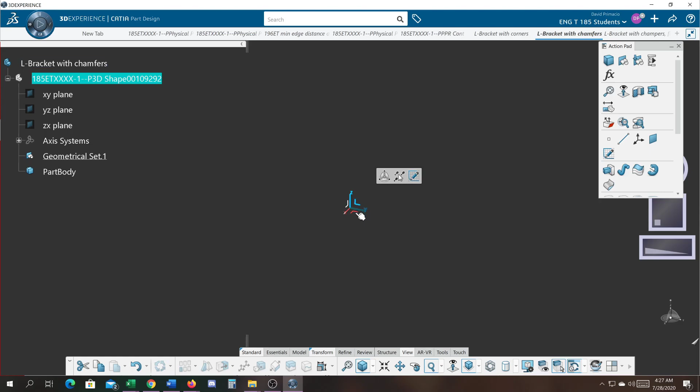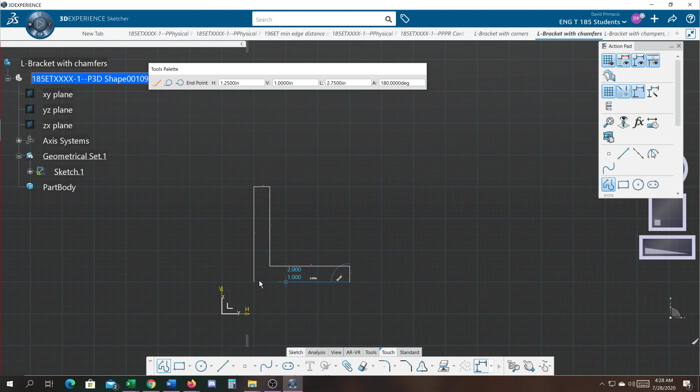We'll go ahead and select this profile and go into Sketch. I'm going to use Profile and sketch my shape, 3 inches and 3 inches, so both legs are 3 inches long.

Let's go ahead and constrain this. I'll use auto constrain, reference these two edges, stack dimension them, and select OK. Unlike the first demo, this is how you would really dimension this part.

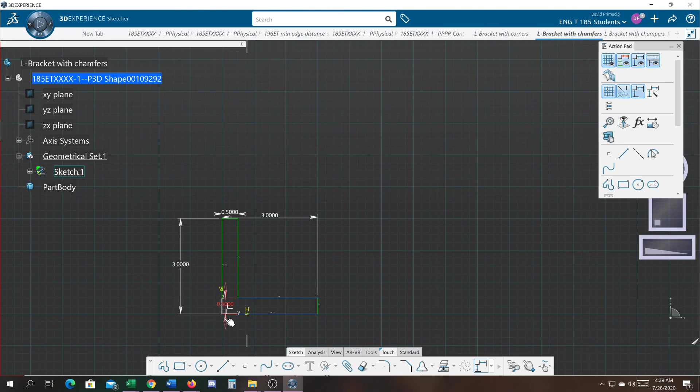One of the things I try not to do is move the constraints, because sometimes it starts adjusting them. So what I do is I get it green by contacting this to my axis. Now when I go to move this, it'll be easier to move, and it won't try to change anything on me.

I'm going to try and grab this and move it up, just because I have a hard time reading it and checking the visibility out on that. You want to dimension to features. These are features, and again, the 3 represents your leg lengths, both horizontal and vertical for this part.

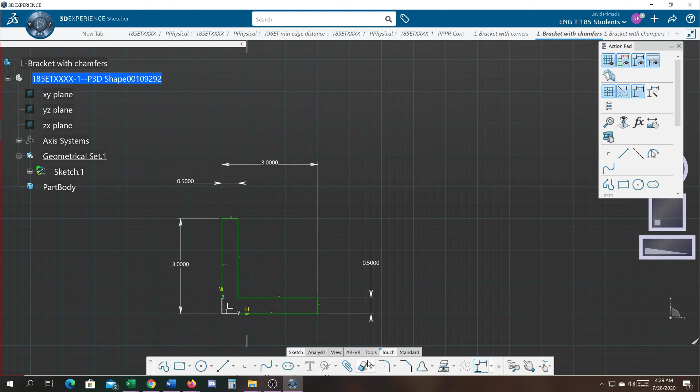We can exit the sketch. The pad is to be 3 inches long as well, so we'll pad this out. We'll go 3, reverse the direction, select OK.

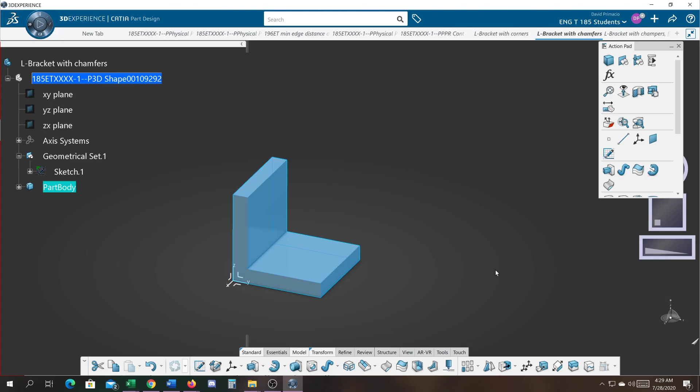We don't want the sketch to be in 2 places, so I'm going to drag and drop it into the part body. The next feature I'm going to teach you is chamfer mode. Chamfer just puts on a flat edge.

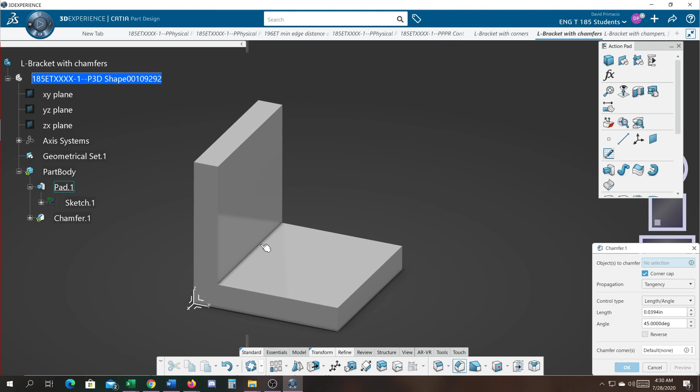So I'm going to do a chamfer, and like we did in the fillet exercise, I'm going to chamfer this line right here, and we'll do a 1/4 inch chamfer. I'll preview that and select OK.

This works the same way as fillets does, and you can see that I can change the angle at any time or the length. Or I can modify the existing chamfer by double clicking it and selecting the edges just like I did using fillets. You notice I got chamfers on the edges here.

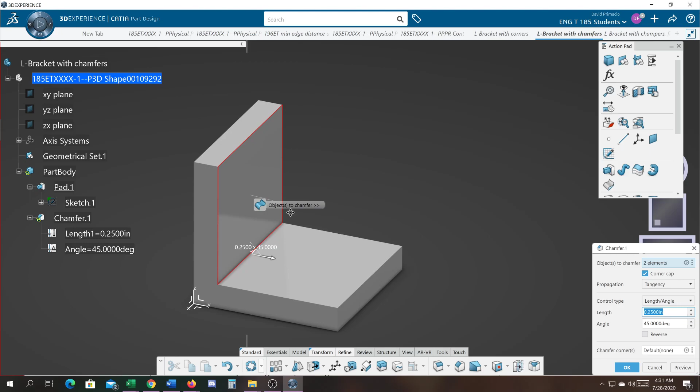So what I'm going to do here is remove those chamfers by double clicking them and grabbing the edges. By the way, I caught the face on accident. Just reactivate the face and it will turn the entire face off.

Another way you could do this is by grabbing the top faces and the bottom face over here, and when I select preview, it wants to do all the chamfers. The only thing is it's a 1/4 inch chamfer and the part is 1/2 inch, so it will run out of material.

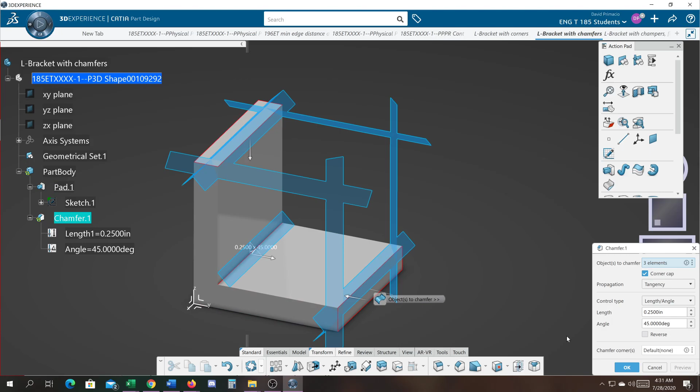I'll try and say OK, and it'll do it if that's what you wanted, the sharp edges on top there. I can change this length though to 1/8 of an inch, and now you've got this whole part all chamfered off.

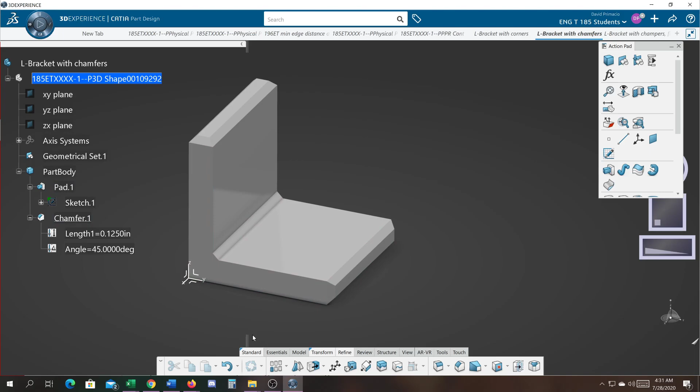It's hard to see the chamfer, so one of the things I can do is go to properties and change it to another color. I'll try salmon color. Now it's a little easier to distinguish the chamfers.

Let's say I want to turn this top off. I double click it, grab the top, and select OK. And you might ask yourself, why didn't it go away? Did anybody catch why it didn't go away?

I'll double click it, grab that top surface, and select OK. Now how did I get a chamfer here and the chamfers go away on the top?

Well, I wasn't being careful when I chose, so I double click this chamfer here. I tried to grab the surface to turn it off, but I missed the surface originally and grabbed the edge instead. So this edge is being chamfered, and then I pick on the face and now the edge and the face is being chamfered all the way around.

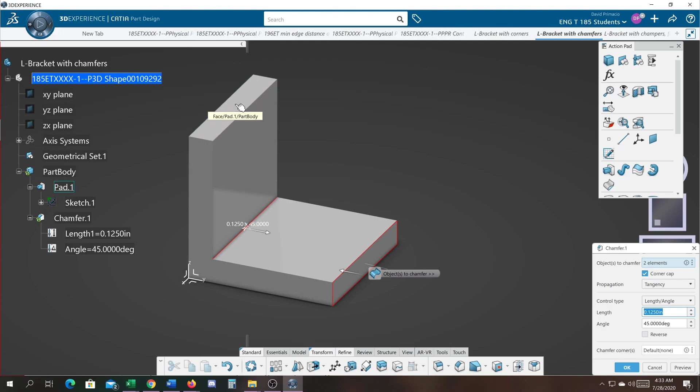So just be careful when selecting that you recognize what's on and off, what you're really grabbing. It might be best to wait and see if you can get the word 'edge' to show up so you can deactivate the edge, and wait for the word 'face' to show up if you want the face to be chamfered. I'll select OK, and we'll do one more chamfer.

I'll chamfer the bottom, which is going to be a bigger edge. I'm just going to make that a 1/2 inch. Okay, so now I've got a 1/2 inch chamfer, and if I go to view and hit my ISO view, I got the 1/8 inch chamfers all along the top and this front surface and right in here.

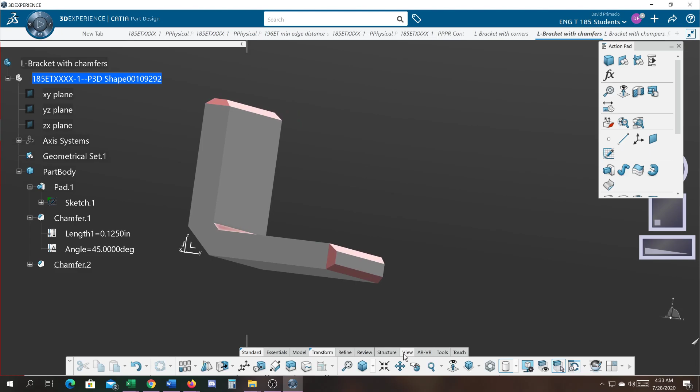Again, if I wanted this one to be bigger, you can't alter it directly. I could double click on it, turn that off, select OK, and then go to that edge and refine this chamfer on that edge.

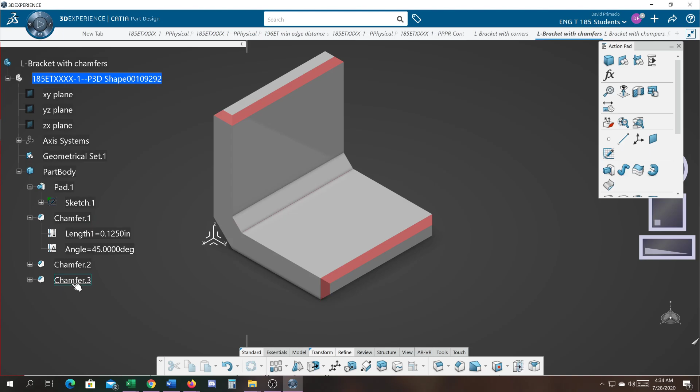To 1/4 inch. So I have different chamfers at different sizes: 1/8 inch, 1/2 inch, 1/4 inch.

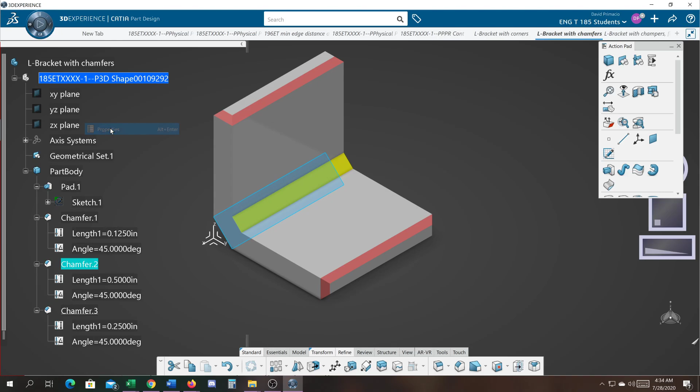I can change the colors. You can get crazy and come up with a bunch of different colors representing each different size. I probably wouldn't do any of this in production, but just for clarity of what's going on here for this particular demo.

You can now see the different chamfers here that were created on this particular part.

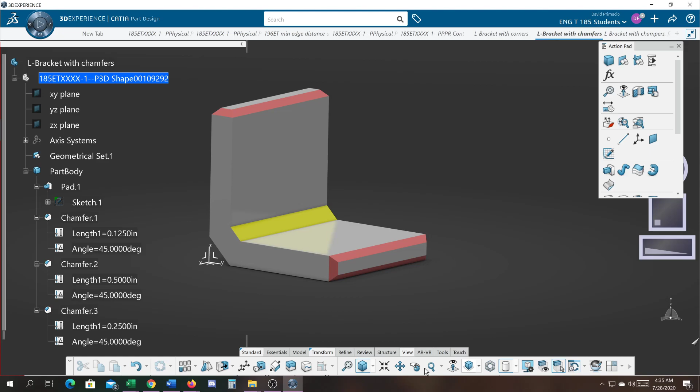I'll finish this by putting it back into the ISO view and doing a fit all in, and I'll save my model just like this. That concludes the demo for the L-shaped bracket using the chamfers.